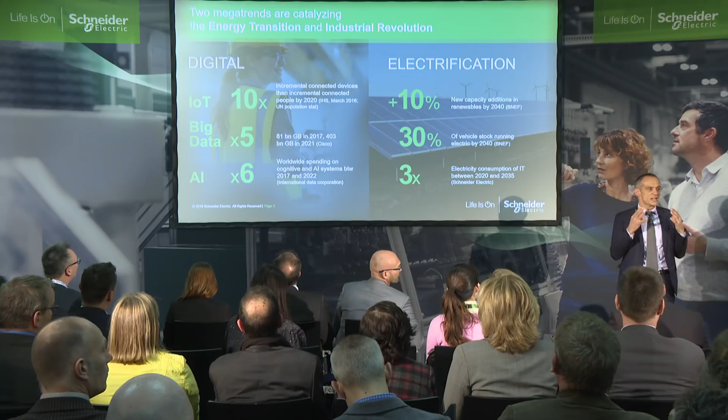We think, and we are really passionate about, this mission happening at a time when there are two technology disruptions as we speak. The first is the explosion of the Internet of Things. While episode 1 of the Internet was connecting people to people, starting in the 90s, what we are doing today is connecting everything around us together, onto the people using them.

The second disruption is that the world is electrifying, because electricity may not be a source of energy, but it's the only vector of consumption of energy which enables decarbonation. When you combine the two, and they combine very well because there are big electrons and small electrons, you can get access to step changes in the level of efficiency. At the same time, we have the deadlock of energy to resolve and efficiency to increase, and these two major evolutions combine to bring new solutions.

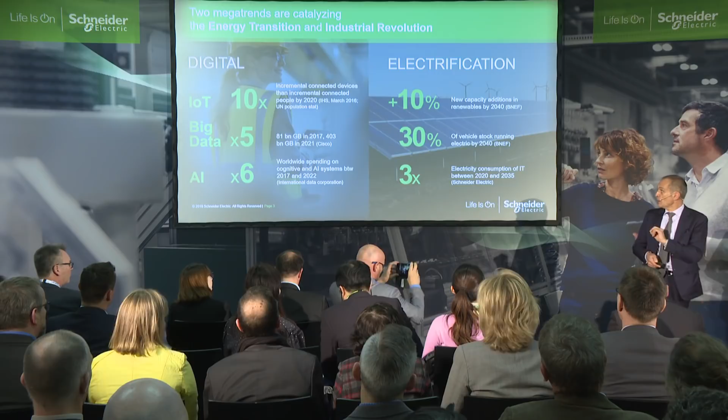So this is Schneider as we speak: end of 2018, 26 billion euros of turnover, 5% of our turnover dedicated to R&D, and 137,000 people all over the world.

Probably one characteristic to highlight is that I think in our universe we are the most global company, roughly the same turnover in Asia-Pacific, Western Europe, and North America, and still a very important part of our business in even faster emerging parts of the world like South America, Africa, Middle East, and Eastern Europe.

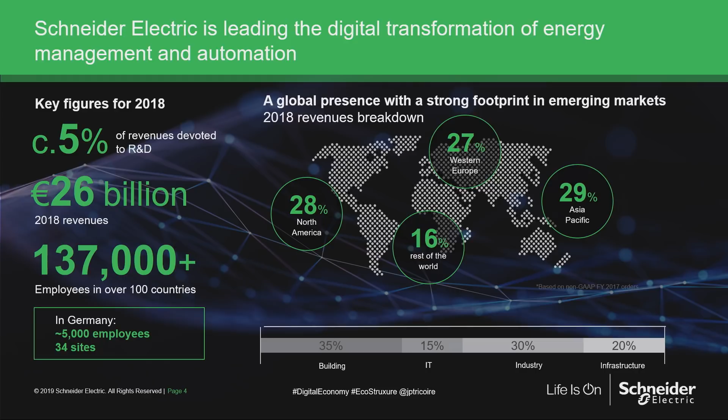Another thing is where do we apply those technologies of efficiency that I was describing? Half of it in what I would consider the commercial environment, buildings and IT. We are the biggest supplier in the world of energy infrastructure to data centers. So every time you click on the internet, in 25 to 40% of the cases, you are powered by Schneider, right? And we try to do it efficiently.

And 50% in everything related to industry and infrastructure. Going to the next one, we are combining two big technologies to supply more efficiency. One is energy management, 20 billion euro of turnover across the world, clearly a number one position, and 6 billion euro of industrial automation, which is the digitization cockpit of what we do, and which combined with energy provides two forms of efficiency, energy efficiency and process efficiency, to supply a complete solution of efficiency and sustainability to our customers.

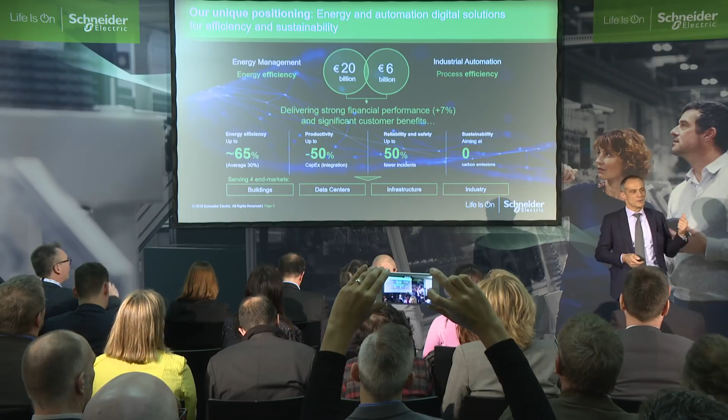And you see that you are very knowledgeable of our sector, that we are actually going along two major transitions happening at the moment, one being the energy transition, the second one being Industry 4.0, which is merging together the world of IT and the world of OT. With benefits which are very clear: energy efficiency, productivity, more reliability and safety for operators, especially when you speak about augmented reality, accompanying guys on the shop floor, making their job better defined and easier to follow or realize. And of course, sustainability.

Take our company, we've decided to be fully carbon neutral by 2030, and we are on a clear path to achieve this objective. You're going to hear in the next 50 minutes a lot about EcoStruxure.

And when you come to visit us on the booth, it's all EcoStruxure. The fundamental benefit of digitization is putting together all the elements of your environment, a plug-and-play platform.

EcoStruxure was initially born in 1997. For those who have followed Schneider for a long time, it was called at that time Transparent Factory, and I would dare to say that we are the first company to bring the internet and Ethernet onto the shop floor at that time.

The first version of EcoStruxure, which was the evolution of Transparent Factory, was launched in 2009. And 10 years after, we've got 10 years of experience in EcoStruxure across every system of Schneider, from the standards of connectivity of the products to the networks, to the way we have developed APIs, all consistent around the platform of EcoStruxure.

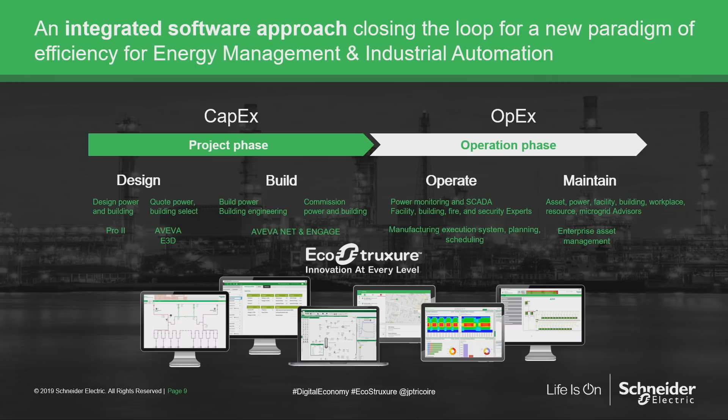If I've got one problem happening on the pump on the shop floor, it should come immediately declared on the digital twin. The third integration is the life cycle integration, making sure that from design into commissioning, into operation, into maintenance, the whole digital twin journey is completely integrated so that you can learn from the operation and bring that back into the design phase, making sure there is no rupture or no cost in going from design and commissioning into operation.

The fourth integration, which is really important, is integrating all the ecosystem working together on a project, and this is the topic of exchange. But power, automation, shop floor to cloud, all life cycle, is what EcoStruxure brings to our customers, and not many companies are able to deliver that form of integration in a practical manner.

So now, as I go forward, I would like to hand over the mic to Peter, who will go more into the details. Thank you.

Thank you very much. Good afternoon also from my side. Is the mic on? Yes, I think it's on.

So talking about these three transformations, many of our customers say, how can you help us to be successful in our digital journey? And here are some of the things that we tell them.

It starts off with having domain expertise in the area—that's the person who can talk about the hospital, the oil and gas plant, a chemical plant, a fine chemical plant, food and beverage, or the packaging application—with a solid architecture. That's of course EcoStruxure, and then a successful platform, which we'll be talking about later on.

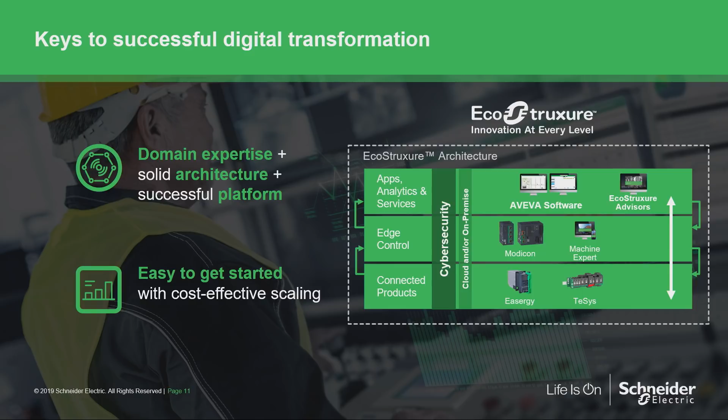One of the very new products coming is the Easergy P5, which supports that, and I'll talk about those in detail. The end-to-end integration from the connected product all the way to the cloud is our new solution that will help our customers automate in the machinery space with significant cost reduction. And then the third transformation is the end-to-end software—I'll show you a customer example and how easy it is to do something that looks extremely complicated.

Now, if we want to start the journey on the electro-intensive industries, where everybody knows we have quite a bit of domain expertise, and of course our EcoStruxure architecture, we've come out with a new system that can help the customer increase their safety.

That's what they're worried about: enhanced flexibility. As they digitize, of course, they're all worried about cybersecurity. In particular, if you're in energy-intensive industries, energy is the prime mean to get your process done.

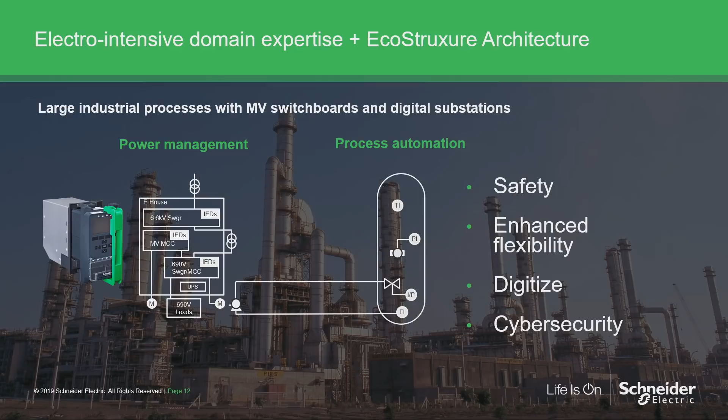With the Easergy P5, you see the connection here. For those on the technical side, this is a valve, or you may have a motor or a pump controlled by a motor, and the motor is connected to the energy management system, motor control center, and so forth. So the connection is clearly there.

So in respect to this digital protection relay, what are some of the key advantages for the user? Of course, there is the embedded arc flash protection, which is critical in a medium voltage application. People from the industry know that every one of those panels needs to be maintained on a regular basis.

That takes an average of 120 minutes per panel. That means 120 minutes your production process is off the energy. So it's critical that you make this much faster. With the Easergy P5, we can do it 12 times faster. In 10 minutes we do the mean time to repair on a panel. The best in the industry are promoting 30 minutes, so we're bringing it further down to 10 minutes.

It's a huge saving. And of course they are also worried about personal safety. You have quite some loads on those power distribution centers. So what we do is through digitizing it, we can control it and monitor it from a safe distance, as you can see from the operator here, who can connect with his mobile phone to the arc flash protection unit and to the protection relay, and operate it. So he does not need to go close, which is a big factor.

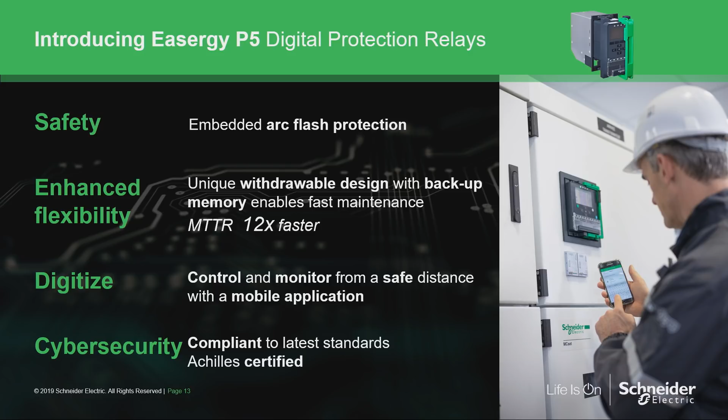If we're taking the second example, I'll take a machine builder. In the machine building space, our customers are worried really about four things. Number one, they need to drive cost down. Total cost of the machinery is one of the things they want to drive down. Of course, they want to increase the performance.

If you have a packaging machine and you can package more units in 1 minute, that means value to their end customer. A third one is, of course, digitization, because they also want to follow the trend. And here as well, enhancing cybersecurity is mission critical. So we're launching quite a few new products that would help customers in that space.

I'll give you an example of a booster pump application, very simple, so it can also be understood by people who are not engineers. The old, classic solution would look basically from a cabinet perspective like this, and the new one like this. What we have done is exactly the same application for the user.

We've been able to reduce the net cost to our customer, the total cost for this cabinet, by 20%, while we increase the performance of the motion, the parts that are moving, by 30%. And in respect to the logic, we are 4 times faster. So quite a few performance criteria that are there, and customers are quite excited.

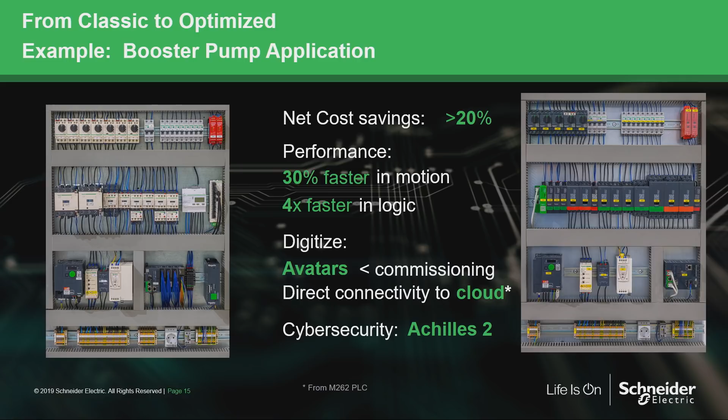Launched today at the Hannover Fair, there are 2 critical product lines here to which I'm going to be talking a little bit in addition. And of course, there's direct connectivity to the cloud with a plug-and-play solution. The contactors can be commissioned with a digital tool. And then, of course, here also Achilles 2 cybersecures the solution.

Now, if we zoom in onto the contactor products, the TeSys is the product family that everybody knows who's been working with Schneider for a long time, and the new product is TeSys Island. It has already won the IF Design Award for 2019, which is pretty recognized in Germany and in Europe, and quite a nice and clean way of doing the cabinet.

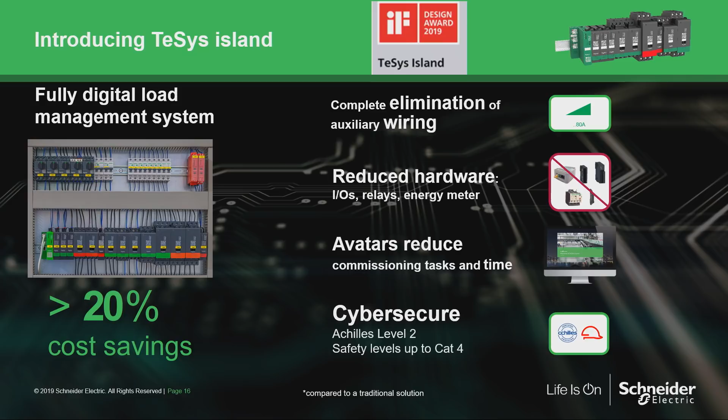So in this example, you can completely eliminate the auxiliary wiring. It's completely gone. You can, in our example, take out 4 of the I/O modules of the PLC. They're all embedded in the contactor. The engineering time with the avatar system will reduce the engineering time significantly. We've taken out 1 router.

We've taken out 3 protection relays because they're embedded. We were able to take a power supply that in the old solution was 10 amps and do it with a 5 amp instead. All of that takes out 20% cost saving out of this small application.

Now imagine if you go to a larger application, what kind of potential there is for the customer. And all of that, of course, with embedded cybersecurity up to Achilles level 2, and a safety level up to CAT 4.

Now, of course, there is also the PLC and motion side to this application, furnished with the Modicon M262, our new IoT-ready logic and motion controller. You can plug and play and get data to the cloud very fast, with commissioning time also very much reduced.

You can bring the contactors into the commissioning system of this motion and PLC solution very nicely, and with that you're much faster in logic. Safety here as well, and increased uptime with the engineering system behind it. This has been extremely well received on the first day as one of the key new offerings we have. The contactors, PLCs, and motion together are a huge offering that Schneider has.

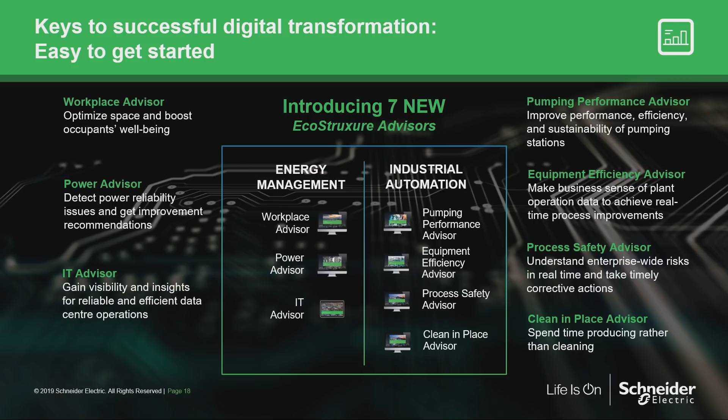A Clean in Place advisor sounds pretty cool. If you're in the food and beverage or pharmaceutical industry, you need to make sure you have the environment in your clean rooms that allows you to produce. The Clean in Place advisor helps you with that, and so forth. So 7 advisors launched this year to support our customers in individual verticals — not a platform that's launched, but individual, easy to get started applications.

Now, if we're talking about larger customers in their digital transformation, they ask us, how can I bring my complete factory into a digital command and control center? Or they say, I have several factories and I'd like to bring them all onto one level to be able to compare them. We've been allowed to share one example from our customer, ADNOC, in Abu Dhabi.

You see I switched the logo, so now I speak on behalf of AVEVA, a company owned by Schneider Electric, at least 60%. They have 12 different operating companies that they wanted to bring into one digital command and control center called Panorama. If you look at it, it looks a little bit like Star Trek.

This wall is 50 meters long, 3 meters high, and brings more than 100,000 data points from their 12 operations into one room. Now, people have said this is going to cost millions and take years to do. That's not right.

We've done this with a customer in 8 weeks, from start to finish, getting 100,000 data points including visualization on the screen. And it does not require top experts to do it.

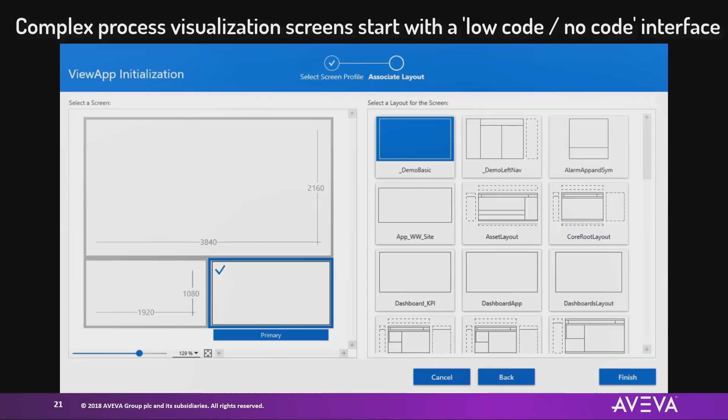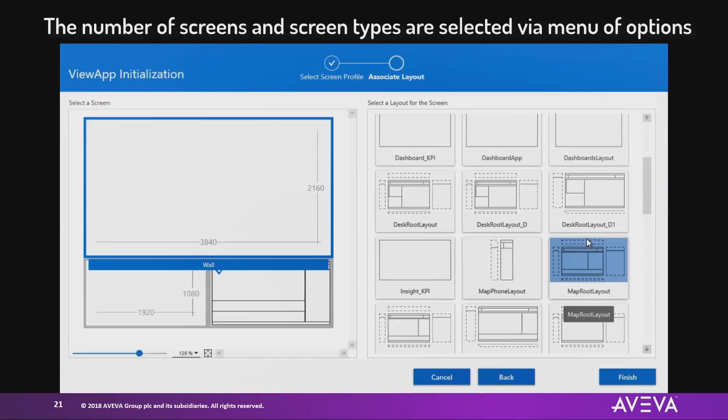First, you start designing the screen, and you have a lot of different possibilities to select how the screen will look. You pick one, you choose it — here a division by 3 screens. Now you decide what you want to show in those 3 screens, so you go to them. This is the so-called low-code, no-code environment that technical folks have heard about.

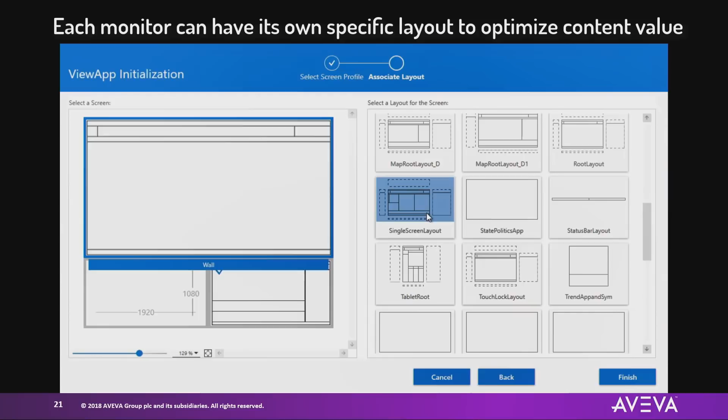So you don't need any programming. It's basically a drag and drop of how some screens should look like. You can see here it's configuring three screens in one and shows how it should look.

Once that's done, the next thing you do is attach data to those screens. In this case, they put a map here, then an alarm application where the alarms are brought to the screen. This is all done automatically. You don't need to do any programming in the background.

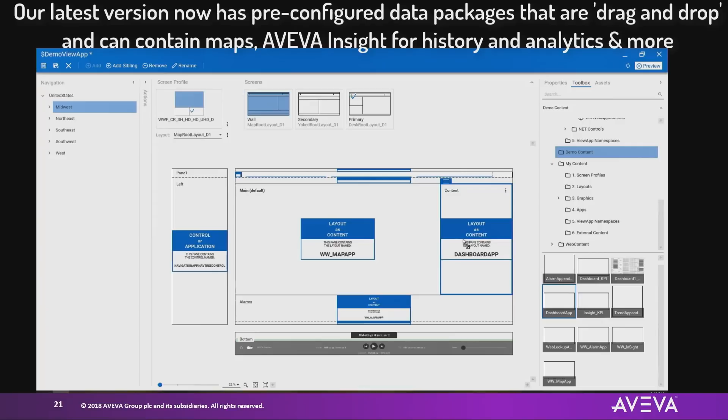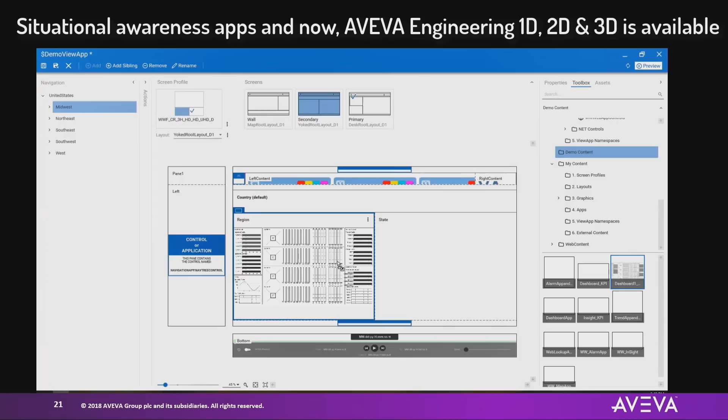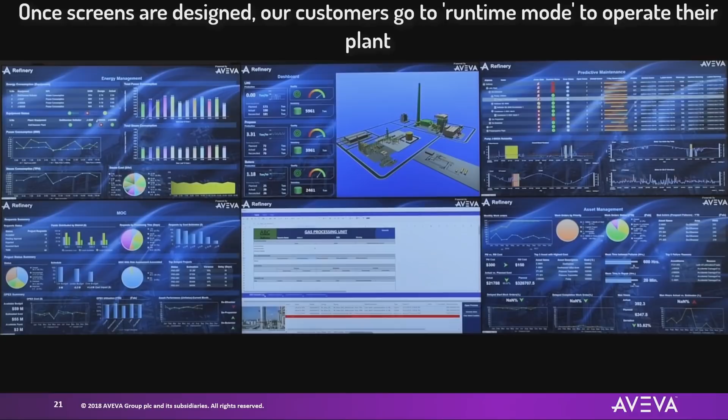So he goes to the second screen, wants to do the same now for the second and third screen. Here, he's pulling AVEVA engineering data in 1D, 2D, and 3D design that's available, and it's dragged on. Application finished - that's the application that was just created here, this screen. You see how quickly that was - five minutes, you're basically done doing that screen and bringing it into a larger application.

In this example, we're combining real-time historical data that comes out of the plant. We can see the trends, we can see the load, for example.

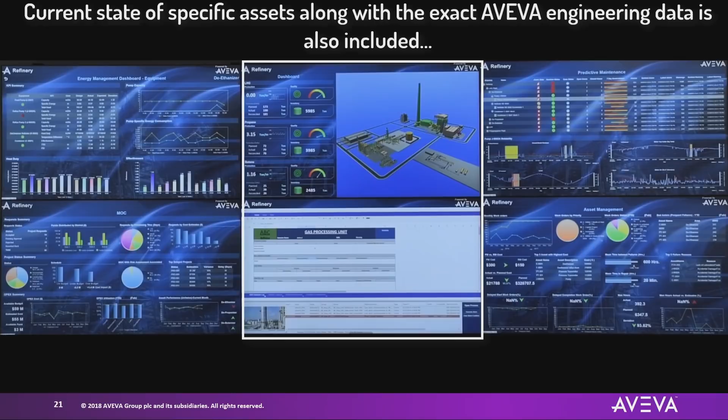Then we look at the 3D model. This is what people would call the digital twin of the factory, which had been designed with the AVEVA software, where you can see context-sensitive what's going on.

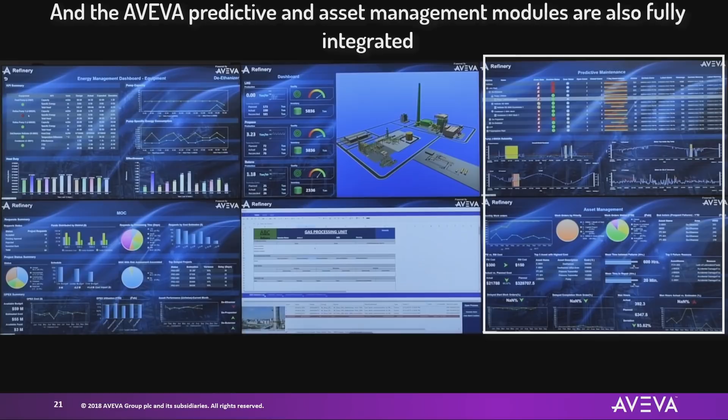And here is some asset management modules where you can do predictive maintenance on a pump, for example. It will tell you when it's going to fail in the future.

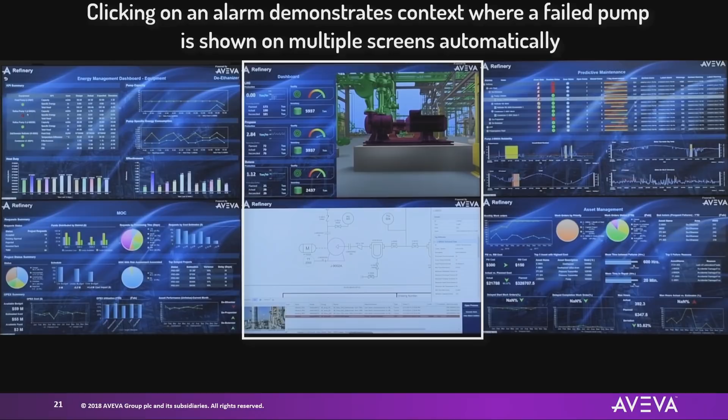So in a second, you'll see the alarm that came up, and it clicked on the alarm, and then context-sensitive, the asset or piece of equipment where the alarm came on appears on the screen. And earlier we said, bring us the schematics on the screen. Here's the schematics - the process and instrumentation diagram automatically pulled up.

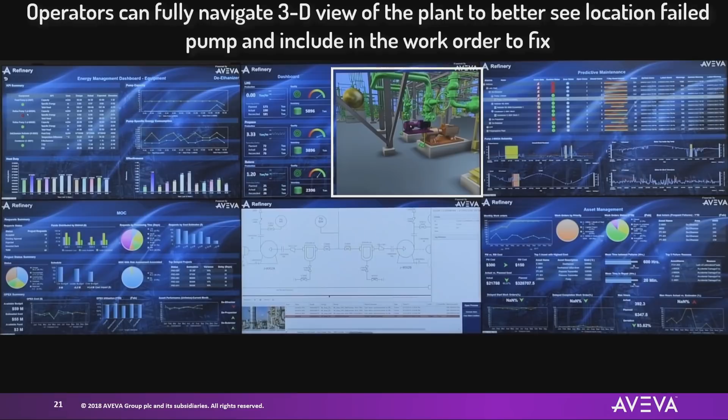So we've programmed this earlier - you see, of course, I'm speaking a little bit fast here. In five minutes, we've been able to link this data together.

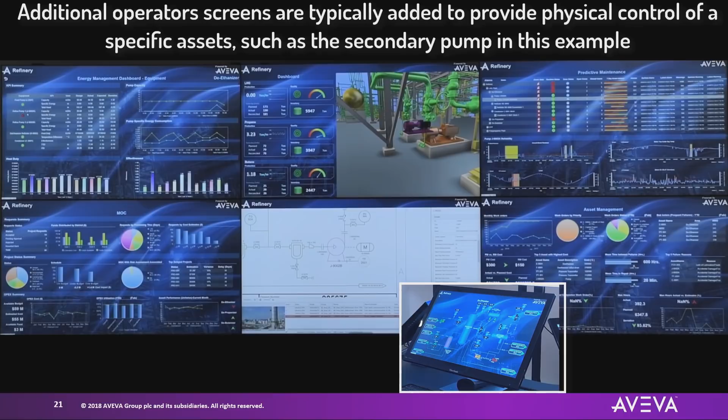Since this is all most modern software that's used, you can use it on multiple devices, also on your tablet. So if you send people out into the field, they can actually take this software with them and do predictive maintenance work, going through the individual data that you would see here - in this case, the pump system.

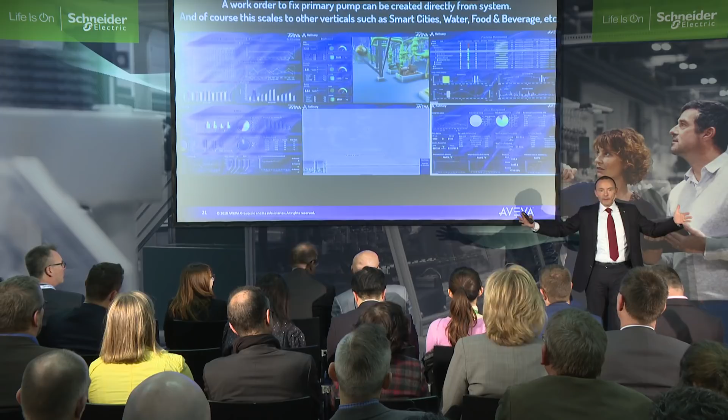So it's kind of an end-to-end journey that we have developed with the AVEVA software and the Schneider software together, and now we have eliminated many of the interfaces that were there before. I invite you to have a look at that in the Schneider booth.

We go all the way down to the motor. If the motor fails, it will pop up in the automation system. You click on the automation system and it will show you the digital twin where this motor is deployed, what kind of piping is connected to the pump, what kind of valves are there, and what kind of service needs to be done - a full integration, very uniquely integrated together for our customers in process industries.

We're also showing, of course, this was an example of a refinery. In the booth, we are showing the same for a food and beverage plant, just to have two examples, but it is for different industries.

So quite a journey in the last twelve months that we've brought this together, and the beauty is it's all been available in the cloud since January, and people can consume as much as they want, meaning it's available on subscription. You don't need to buy the whole package, you just buy as much as you want and as you need. So a very unique offering that we have in the process industries here as well.

And that shows you the end-to-end integration. Now, obviously, I've shown very simple applications to more complex ones, even more complex ones. This is not all what Schneider can do. I think it requires quite a network of partners, and we have always promoted that.